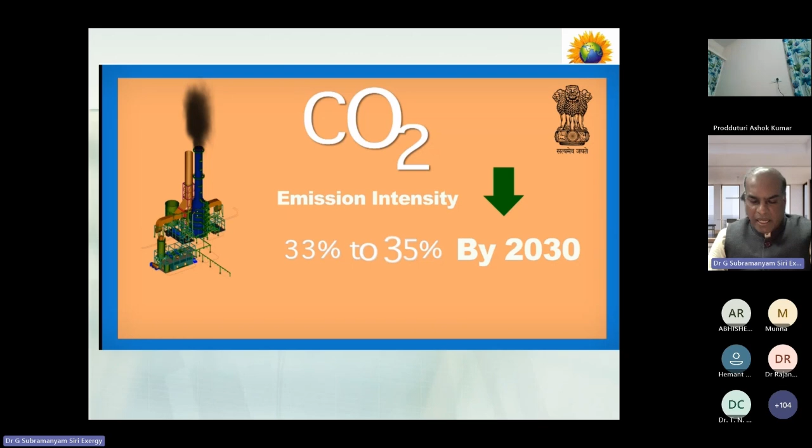Next, what is India's commitment? At COP26, our Prime Minister Narendra Modi agreed to make India net zero by 2070. If we look at this, I think it is achievable.

Earlier people said it was not possible, but the way things are going, different decarbonization activities are happening throughout the world, and we are achieving the targets we set. So 2070, though ambitious, is achievable.

Many companies in India, like Infosys and other IT companies, are already carbon neutral. From them we can learn many things about how to achieve carbon neutrality. Many activities are going on in each sector, whether industry, municipal, or agriculture, including demand side management for energy efficiency and decarbonization.

I can tell you about this, and give some case studies where we have done work and were able to achieve net zero.

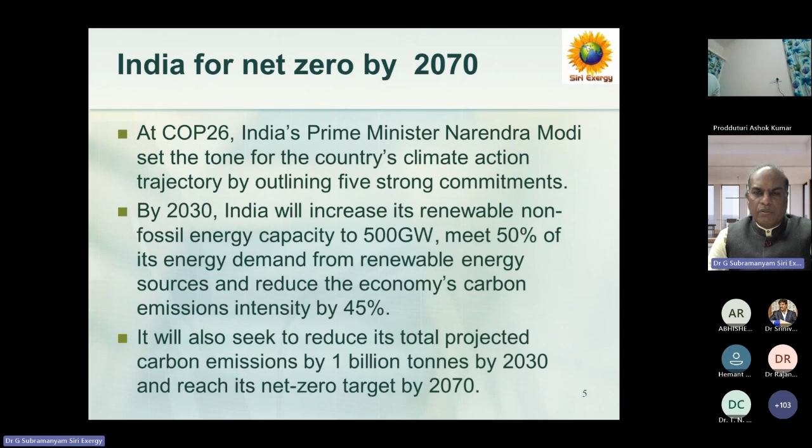So for that, first we should know what is the existing carbon footprint of any industry, or even your institute. Suppose you have Jalandhar NIT, there also we can quantify what is the carbon footprint. Once we know the carbon footprint, then we can devise an action plan for how to reduce and make it carbon neutral.

Depending on the funding available, or depending on the timeline. So anything is C plus O2 equals CO2. If you know the carbon content of any fuel, by burning it we can quantify how much CO2 is emitted. This is a simple equation: C is 12, O2 is 32.

12 plus 32 gives 44 kgs of CO2. By burning 12 kg of carbon, so that means per 1 kg of carbon, 44 by 12, that is 3.67 tons or kgs of CO2 is emitted. Based on that, we can find out how much CO2 is emitted by different burning of fuel. So do you have any idea?

Suppose every one of us is using power, because we are talking about this for 5 days, going to talk about different ways of utilizing power and multi-poly generation etc. So to generate 1 unit of power, suppose we are using a thermal power route. Thermal power, because almost 60 to 70% is still through the thermal route. So just I am giving a calculation.

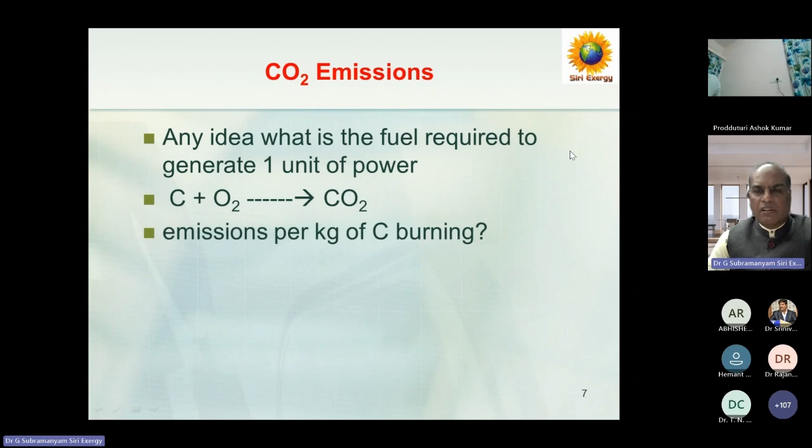So just I'm giving an example. So a simple example is, for anything we have to quantify the carbon footprint. Carbon footprint can be done for any industry or your organization, your own institute. So if you want to produce 1 unit of power, what is the carbon emission? It's just giving an example, because depending on the efficiency of the power plant, the supercritical plants have around 0.67 and efficiency goes to almost around 40.

But typical average comes to almost 1 kg of coal required to generate 1 unit of power, because now almost 60 to 70% of our power generation is through the coal, thermal route. So 1 megawatt requires 1 ton, 2 lakh megawatts of power out of around 4.3 lakh our installed capacity, and in that we take 50% average depending on the plant load factor.

So 2 lakh megawatt we are generating, that means we are consuming 2 lakh tons of coal. So that is, if you calculate what our emissions per annum are - since it's on an hourly basis, megawatt into hours of operation, 8760 hours. If you multiply, and also considering the carbon content in the coal, roughly 40%, it comes to 2.6 billion tons of CO2 we are emitting.

So where does all of it go?

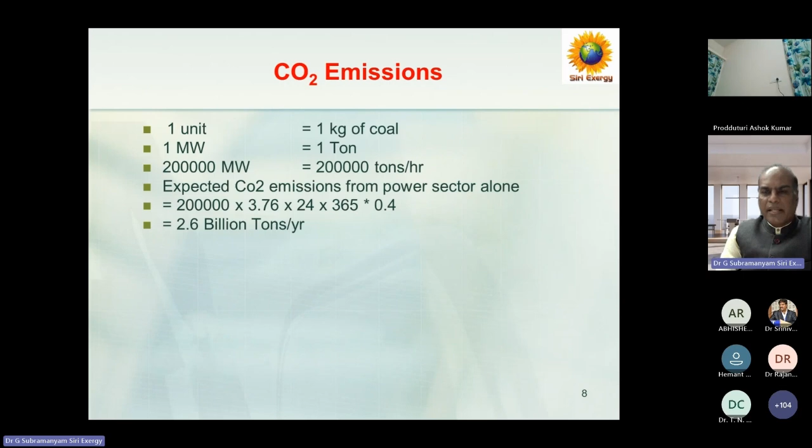So this CO2 is a culprit, and it is going to atmosphere and creating a global problem. That is global warming. So not only industries or power plants are emitting CO2, even you and I are also contributing to this CO2.

If you are using a 100 watt bulb, or nowadays even a 40 watt tube light, whatever, it is contributing. Even if you use it for 4 hours, we will be contributing almost 120 kg of CO2 per annum.

If you travel by car 300 kilometers, that contributes almost 66 kg. If you travel by train, that is 21 kg, because it has a large carrying capacity. Suppose you take a flight, Hyderabad to Mumbai or Mumbai to Delhi, a 1 hour flight contributes almost 164 kg of CO2.

Even if you watch TV for 6 hours per day, our contribution is 250 kg. A refrigerator working in the corner quietly contributes more per annum. If you add all this together, it contributes to almost 1.02, or roughly 1 ton of CO2 emissions per person per annum, that is per capita.

That means CO2 is not emitted only by industries. We are also contributing, either directly or indirectly, because all these emissions are contributed by us. So it is our responsibility to reduce these emissions wherever we are emitting. We have to identify ways and means of reducing CO2 emissions, and we have already taken a challenge for 2070. Now we are working on how to decarbonize, how to make it carbon neutral.

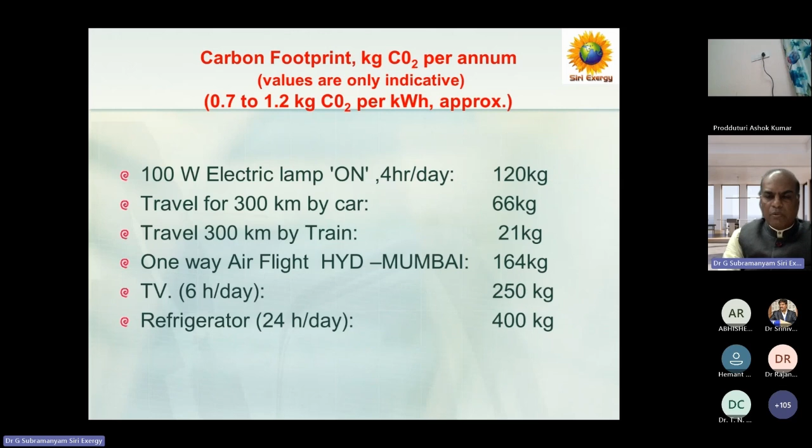Since many of you are learned people, professors in the teaching field, you know what the greenhouse gas effect is. Suppose we are traveling by flight, they announce you are traveling 30,000 feet above sea level, and the outside temperature is -40, yet you are maintaining a comfortable temperature inside the flight.

Why is this possible at that height? Because there is an atmosphere, and in that atmosphere there is CO2. CO2 is available, and in fact CO2 is a God given gift.

Sunlight takes almost 8 minutes to reach our mother earth, but the entire part is not absorbed, some part is reflected back. Whatever is reflected, the CO2 in the atmosphere brings it back to the earth, and by that we are able to maintain our temperature at 30 to 35 degrees centigrade, where we can live comfortably.

Whereas the same is not possible on other planets, because we know there are 9 other planets, but this is possible only on Earth. That's why people are able to survive on Earth, whereas on other planets we don't know if there is any life or not. So in fact CO2 is a useful gas, it is there in our atmosphere helping us maintain our temperature at 30-35 degrees centigrade.

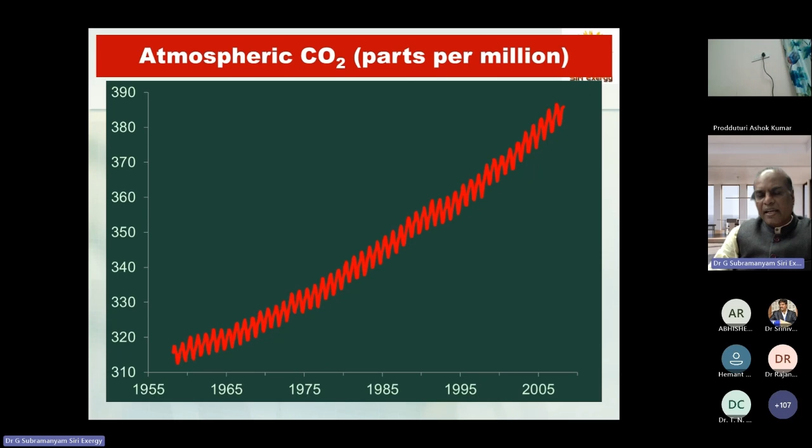It is the 10 warmest years, particularly now in 2025. You can see temperature is rising and also CO2 is rising. They are both directly proportional. This indicates there is a direct relationship, but we have data.

We have data since 1900. So it is not a single day or a single year, it is a long process. Over 100 years, our global temperature has gone up by only 1 degree. 1 degree is nothing, we can bear that, no problem.

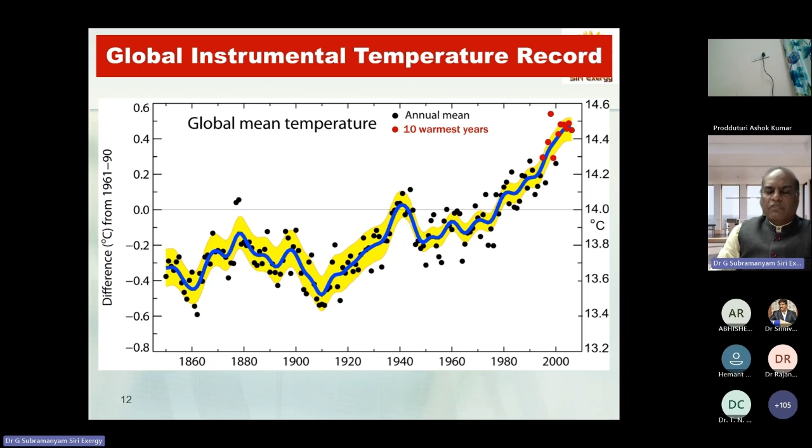But if the same trend continues, the expected rise in temperature is 4 to 5 degrees in this 21st century. Imagine 4 to 5 degrees increase, what is going to happen?

What will happen? This is happening every second, every minute, every hour. If you see the ice melting and ice falling, it looks very beautiful, but the problem is this is happening. We should be able to control it, we should be able to curtail it. Otherwise our sea levels are rising.

As I said, over 100 years our sea levels have risen by only 1 meter, with 1 degree rise. Imagine now if the temperature globally increases 4 to 5 degrees, there is an expected rise in water level. Most of the low-lying areas may submerge, particularly some areas like Andaman, Nicobar, or some other regions, they may submerge in the water.

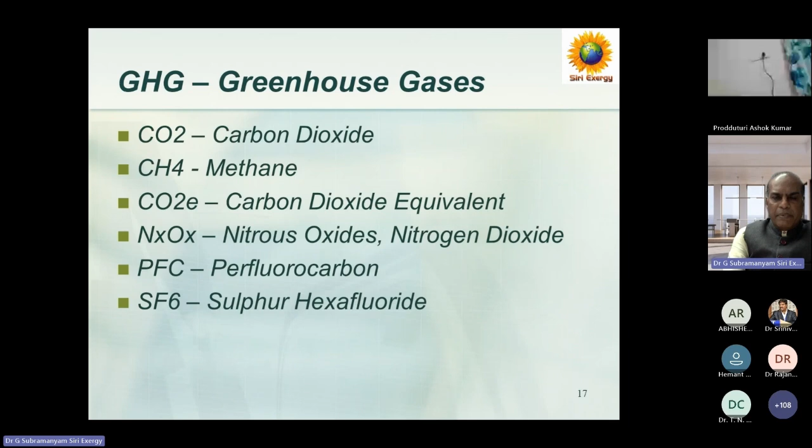So like that there is a global warming potential for each gas. Once you know, suppose CFC has almost 4,500 global warming potential. If 1 ton is released to the atmosphere, by multiplying by 4,500 you can know the carbon credits or carbon emissions. Whereas for methane you multiply by 27, and for nitrous oxide you multiply by 270. This is how we can quantify greenhouse gas production, in case we want to convert it into carbon credits.

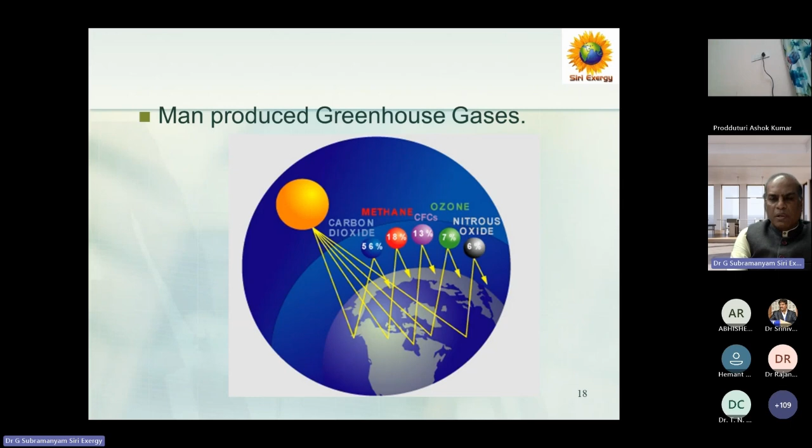So now we want to make a carbon footprint of your campus. So what are they already divided as per the protocol? As per the protocol there is scope 1, scope 2, and scope 3.

Scope 1 is mainly direct emissions. In case in your campus you are running a DG set, or you are using LPG in your campus, it is a direct emission. For direct emission we can quantify how much diesel is burned, then there is a conversion factor, based on that we can quantify how much CO2 is emitted in direct emissions.

Then scope 2 is indirect emissions. Indirect emissions in the sense, suppose you are using electricity, say in Punjab or Jalandhar, wherever, you are using Punjab Electricity Board. So from there, nearby power plants are there, number of power plants are there. But it is an indirect emission - you are using electricity, whereas the emissions are at the powerhouse. So that is called indirect emissions.

So next is scope 3. Scope 3 is related to travel, business travel. Suppose you are going for your official purpose, to say Delhi or wherever, either by flight or train or by bus. So that has to be accounted.

Suppose in the industry there is a transport system - transport of raw material coming in, and the final product going out. So for both of these you are using some vehicles. There are some of your own vehicles, and also some outer vehicles, maybe belonging to Ola or cabs, or for transport from a contractor - contractor vehicles keep going. So these are quantified under scope 3.

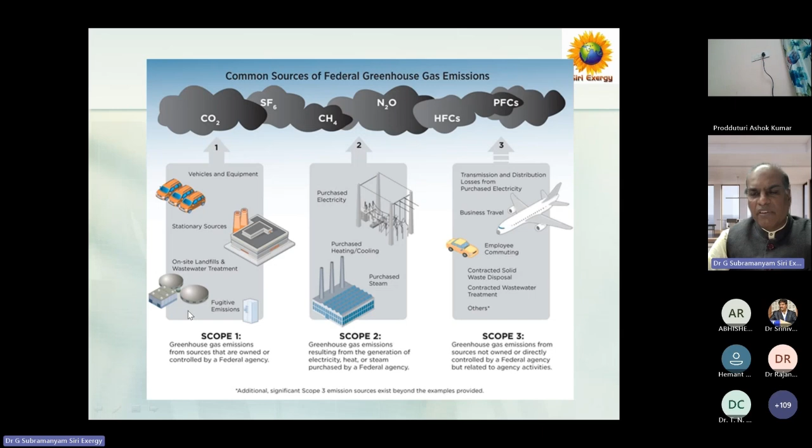This is why I would talk about travel. Suppose you have a college bus or university bus - that has to be accounted in scope 1, because you know how many trips it makes, how many days it travels, so you know the quantity of diesel or petrol used. Whereas individually you using your own car is optional, whether you want to quantify it or not. But if it is a company or university-owned vehicle, that can be quantified under scope 1.

Next is what are the main contributors. As I said, suppose you have a boiler in your campus - it may be there only for research purposes, whereas in many industries a boiler is a must and operates 24 hours. Whereas a DG set will run only during emergency, whenever there is a power cut. And again, a gas turbine - if it is a gas-based power plant, the gas turbine also runs depending on gas availability.

Transport is a major contributor, because every chimney of a two-wheeler or four-wheeler is a potential emitter. Then AC, as already said, chlorofluorocarbons we are using in ACs. Then some processes also emit CO2. Then fire extinguishers use some amount of chemicals. Then food preparation, that is canteen.

So you have your own canteen or maybe a caterer. The caterer will bring food inside, or wherever you are using it inside campus, you are using some LPG. So the amount of cylinders you use, how many cases of LPG is burned inside, those have to be counted.

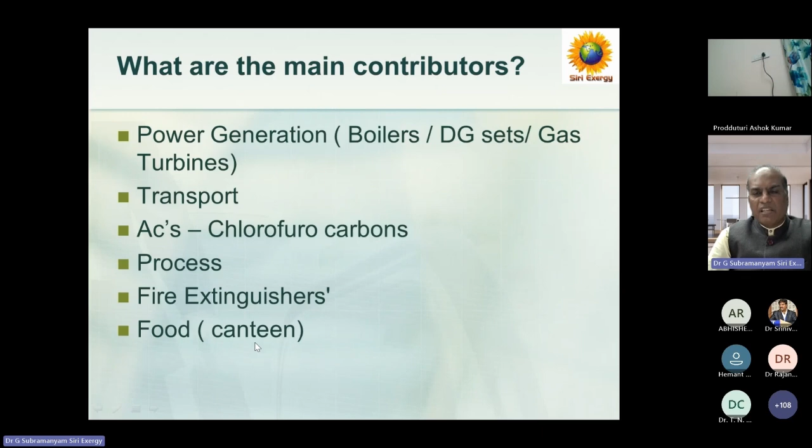Those figures have to be taken from your HRD department or finance department. These things have to be quantified, and there is a conversion factor. By applying conversion factors, everything will be converted to equivalent CO2.

Then, what are the possible areas for carbon footprint reduction? Once you identify the source, you have to find out how you are able to reduce it. So one is energy conservation, energy efficiency.

By increasing efficiency, suppose you had earlier a boiler efficiency of say 80%, you can go for 85-88%. Suppose you were using a gas fired boiler, you can go up close to 90% also. So energy conservation, energy efficiency, that is a major area.

Suppose your equipment is very old, so efficiency has gone down, there is a lot of variation from the design and the actual. So we have to find out what is the deviation. Then we can think of going for energy efficient equipment replacement.

I am giving just one example of AC. So it's a window AC. Earlier there was 2-star, 3-star, 5-star. Nowadays there is an inverter AC, which gives almost a 40 to 50% efficiency improvement. So like that we can able to improve the efficiency of the system.

Even we can have some energy efficiency gadgets available, those can be attached. Maybe we can go for some variable speed drive, and the inverter AC is nothing but a variable speed drive. So by efficiency improvement, by adding those retrofits, we can able to reduce energy consumption and increase efficiency.

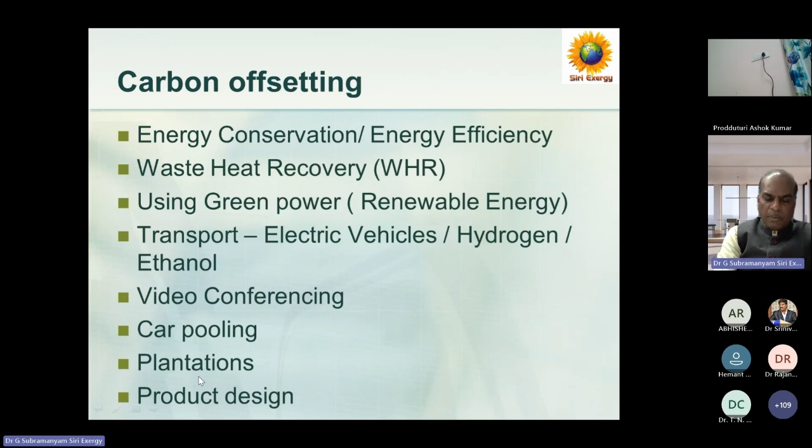Another simple example: lighting. Everybody wants light. Earlier we used incandescent lamps - suppose 100 watts used for 1 hour contributes 110 grams of CO2.

The same LED lamp gives equivalent or even better light. Comparing lux, an LED lamp can give more than 120 lumens per watt, or nowadays even up to 200 lumens per watt. So a 9 watt LED gives equivalent light to 100 watts.

That means we are directly reducing about 90%, almost 91% of energy, and also 91% of emissions we can reduce. So this is the simplest example of how energy efficiency can reduce our carbon emissions.

And also the investments - if we calculate, an ordinary bulb may cost 10 rupees, but an LED lamp may cost 100 rupees. Though it's 10 times the cost, if you look at the life, an ordinary bulb may last only 500 hours, whereas the LED lasts 50,000 hours, as per the standard, and we can calculate the cost accordingly.

Suppose you replace one bulb, we can save roughly 90 watts. If you use it for 5 hours, that's 90 into 5, meaning 450 watts saved per day. Divided by 1000, that's 0.45 kilowatt-hours per day you can save.

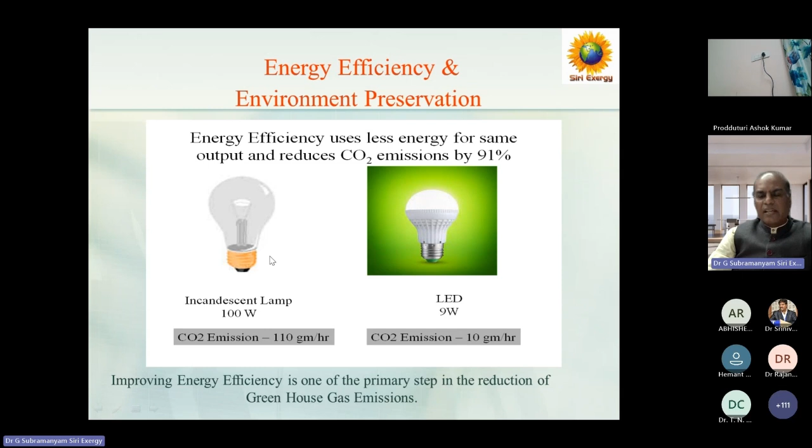Srinivas Garu has already explained that we are an accredited energy auditor. We have received best energy auditor of the year award more than 10 times since 2008, and we carry out audits every year, as it is now mandatory. We are also implementing ISO 50001 near you, in Chandigarh. Recently we carried out an energy management system implementation at Nabha Power, which has a supercritical power plant. There we implemented ISO 50001, and we are also doing net zero building audits.

So we have done already 2-3 audits for NTPC, admin building, there is a service building, and carbon footprint studies. So we have done for HPCL, Midhani, BDL, Bharat Dynamics Limited, one is a pharma company, in coal fields, Jindal Stainless Steel. So these are the audits we are doing for net zero buildings, and also for the carbon footprint studies, so that we can able to make them net zero in future.

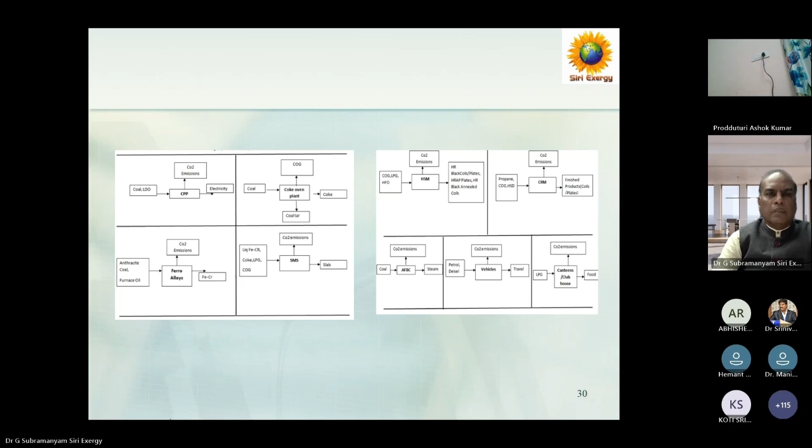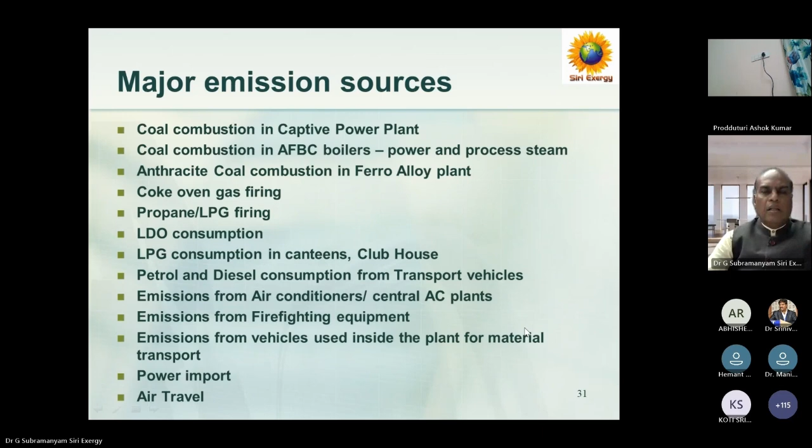So this is quantified, you can see scope 1, scope 2, scope 3. Of course, we have done this some 4-5 years back. See what is the total emissions, GHG emissions? Here it is almost 24, almost 25 lakh. So 25 lakh tons of CO2 is being emitted every year, and under this the scope 1 is major.

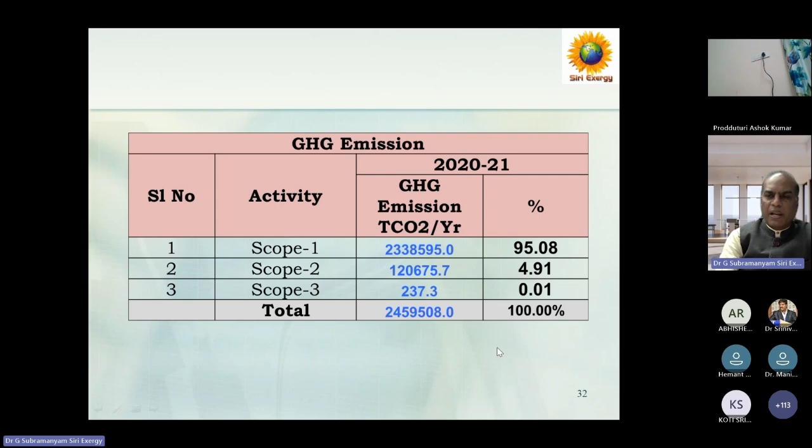95% is scope 1. Scope 2, because their power, they are getting from outside, that is imported power. Though they are generating power, for that coal is used, so that means that coal is burning inside, so it comes under scope 1. Whereas scope 3 is nominal, whatever scope 3 travel, it is nominal, 0.01% that can be neglected. So by this we can able to know which is the contributor, scope 1. So for scope 1 we have devised, we have told them what are the action plans we have given. So this is the total carbon footprint of this company, around 25 lakhs. Then SMS production, because you have to quantify in terms of per ton of production, so per ton of production, total employees are, you can able to quantify.

Suppose in case of your campus, we can quantify in terms of number of people staying, either faculty or students. Whereas here you can quantify per ton of production. So per ton of production is coming to 2.8 tons of CO2 per metric ton of production. And specific emission per person is coming to almost 300 tons per person.

So whereas there is a steel, international steel norm. What is the international norm? International norm is 1.85. So there is a mark, whereas these people are at 2.8, whereas international norm is 1.8. That means there is a scope for improvement. So by this, we can able to see what is the margin.

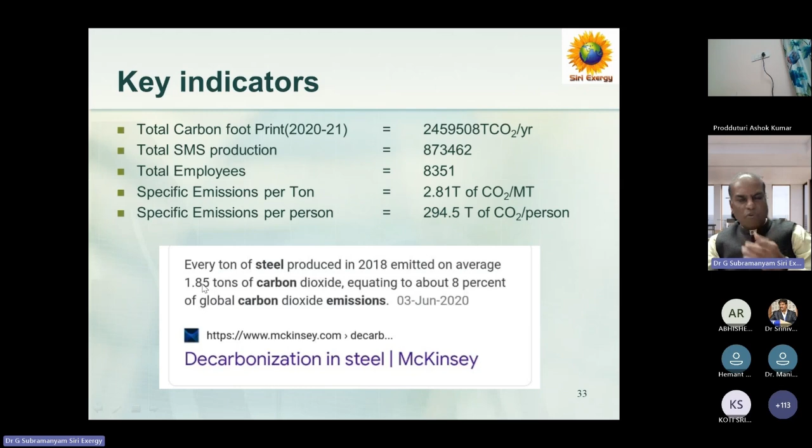In our case, we have given some, because I cannot reduce total. So what are the possibilities based on our audit, we have given equivalent, because we have done it through energy efficiency. Energy efficiency, we have given an action plan to reduce almost 50,000, in terms of MTOE, that is metric tons oil equivalent. Even this has been signed by those people. As energy auditor, I have signed. As the energy manager, their energy manager signed. So based on that 50,000 equivalent, we can able to say reduce in a 1 year period.

And there is an equivalent we can able to convert. Roughly 1 ton of oil equivalent to 3 tons of CO2. So you can simply multiply by this. That means almost 49 to 1.48.

Then through plantations, we have quantified how many plantations have been done. However, what is the growth every year? Based on growth, we have quantified how much carbon sink is being created. So total 1,51,000. That means what is the percentage reduction? 7.36.

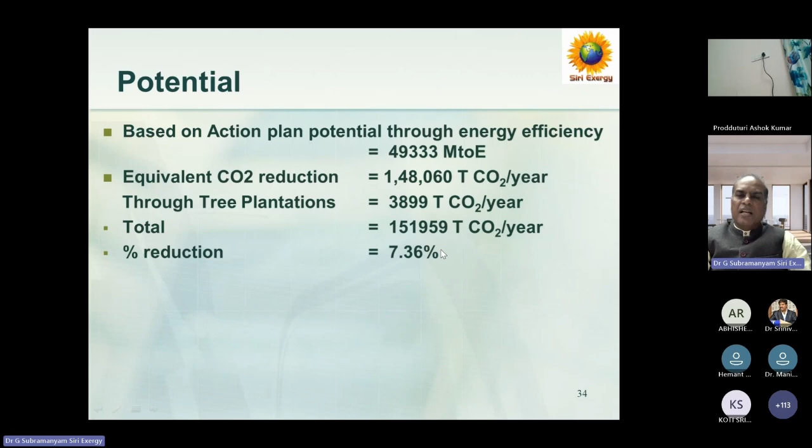So what we can able to, because this is possible in the steel industry or cement industry, where you can't give carbon neutral. That means totally they cannot do it. They have to go for, maybe they have to buy green power, then can able to make it carbon neutral. On their own, they cannot able to make it, because nobody can produce steel without carbon, without power generation etc. So this is a possibility, 7 to 10% is possible. This is already being implemented, and able to achieve sometimes very close to this.

I'm giving another example, green building. One I talked about mines, second is the steel industry, next is the building. This building again is applicable to you also, your campus also possible, because depending on your square feet, what is the area of your campus. So what units consumed per day - one of the buildings consumes, roughly per day it is almost 1500 units.

1500 units per day consumption. And also number of days working, 300 days, number of holidays, working on holidays - what is the load, the non-working days consumption we have taken, suppose in your case Saturday, Sunday. In annual consumption we have quantified and converted, because every year CEA, Central Electricity Authority, publishes the CO2 emissions, because not only coal - we have nuclear, solar, wind.

Nowadays biomass is very nominal. So those things, because it's a mix, energy mix. Based on that, we can quantify what is the emission factor. This emission factor was 0.82 earlier. Now this has come down to almost 0.73, because efficiency is improving - we are adding more and more solar to our grid. That's why emission factor is coming down every year. Earlier it was 0.82, now it is only 0.75 or 0.76.

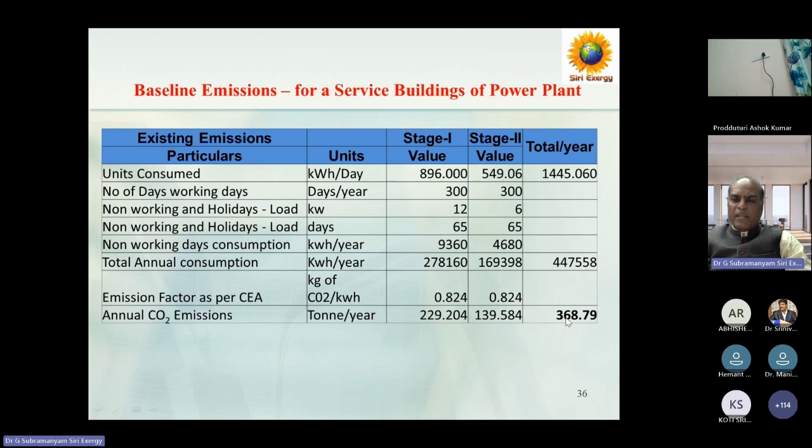So annual emissions we have quantified only 368 tons, but 368 tons is very nominal for a building - they have a small service building. So we identified we can go for internally putting some solar, and we try to reduce by energy efficiency, whatever ACs are there, whatever lighting is there. Through that we have given an action plan, to make it net zero.

So we have given - use energy efficient fans. Nowadays in the market there are BLDC fans. By that, how much can it reduce? Energy saver for split AC, energy saver for solar - by solar we can able to reduce. Replacement of old ACs, cost economic usage, suppose for conferences etc.

We can go for a skylight. By putting a skylight, we can reduce power consumption during daytime, so whatever daytime you are working, you can put a skylight. Then delamping of corridors, wherever lux levels are high, we can reduce this by stage 1, stage 2. So total put together, we have given an expected CO2 emission reduction close to that, meaning they can make it net zero just by implementing some of these options.

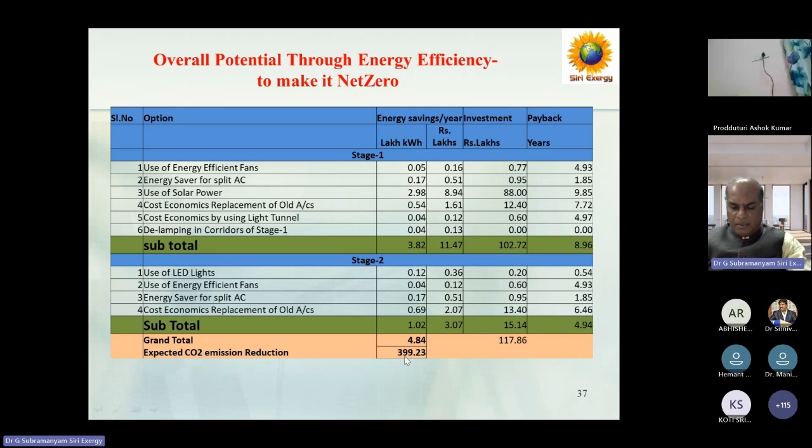So now, any doubts so far? So that we can give another study recently we have done for one of the pharma companies, some pharma companies, under decarbonization.

Government of India, through the Bureau of Energy Efficiency, recently brought out, because earlier we were doing PAT, that is Perform, Achieve and Trade, converting into carbon, equivalent metric ton of oil equivalent. Based on that, one oil equivalent equals one energy saving certificate. Now in future, we are all going for a carbon credit trading scheme. So whatever carbon credit, earlier it was for the international market.

Whereas this carbon credit, the PAT scheme, Perform Achieve and Trade scheme, was only applicable for India. So the Bureau of Energy is converting to CCTS, and the framework has been created. Shortly they are going to announce the targets, because already under CCTS the baseline audits are over for a number of sectors, and they are going to give a target. Once the targets are given, they will be given a time frame, maybe 3 to 4 years, within which they should be able to reduce, otherwise they have to pay penalty. So the penalty is going to be huge.

Nowadays, for 1 metric ton of oil equivalent, the cost government has fixed is 18,402. That is the maximum price, and this again depends on market trading, so depending on the market it will keep fluctuating. There are more sellers nowadays than buyers, so it has reduced to a low now. But the minimum cost is 1,000 rupees for 1 metric ton of oil equivalent, and that 1 metric ton equals about 3 carbon credits. So this scheme is going to come shortly.

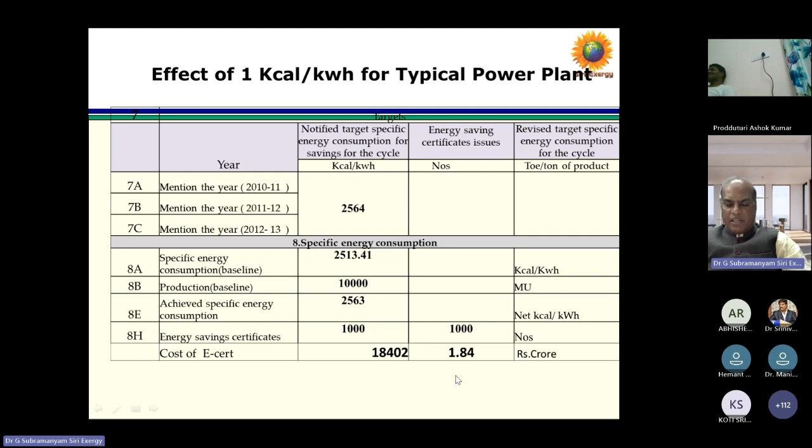I'm giving another example. Suppose in a cement plant, also same. So they convert kilocalories per, not kWh, this is per ton of cement production. What is the metric ton of oil equivalent? That is equivalent to 699 kilocalories. 699 kilocalories of energy is required to produce 1 ton of cement.

Suppose if you are able to reduce it from 699 to 698, that means, this company having a production of almost 41 lakhs of cement they are producing. And this is all actual figures, I am not theoretical. This is all based on the Gazette of India, and their actuals I have calculated.

So if they can reduce by just 1 kilocalorie, they can get an energy saving certificate of 410, and at 18,402 they can get a benefit of 75 lakhs as an incentive. So this is an incentive, in case they don't reduce, there is a penalty also. So hefty penalty is also there.

So PAT says you can use it both as a reduction tool and also as a tool for imposing penalty. If they don't, a penalty will be referred, and it is given as non-conformity, which they have to submit or buy from the market. Suppose there is a shortage, instead of positive there is negative, so many of the 410 energy saving certificates they have to buy from the exchange.

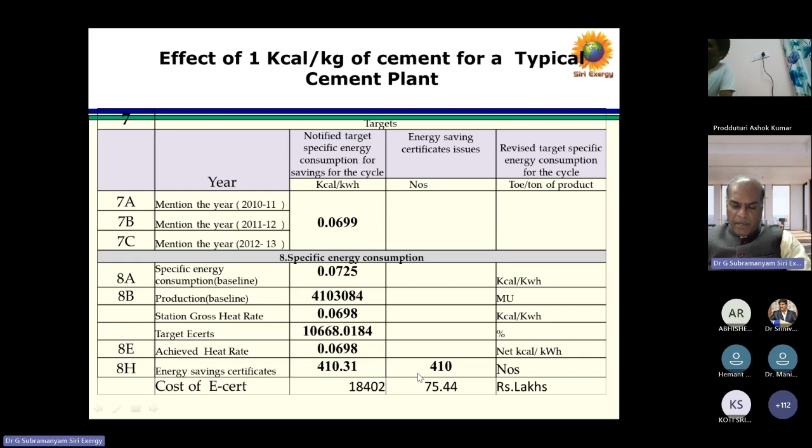Suppose some instrument is there and calibration is not done, so you can get it calibrated and close that non-conformity. All this can be done by spending a small amount. Whereas here, there is no other method to close non-conformity, you pay penalty. So whatever you are showing here as penalty, it comes to huge lakhs and crores. That amount has to be paid, that is closing the non-conformity.

So I am giving another example. Suppose a distribution company, Punjab State Electricity Distribution Company is there. So they also have targets, they are typical. So 14.44 is the T&D loss, that is transmission distribution loss. This can again be checked from the Gazette. So this is 14.44.

10,224, so 10,224 is their baseline, this is the target. If they are able to go below the target, they can get 10,224 energy saving certificates, or in terms of rupees, 18.81 crore benefit they can achieve at the higher rate. But the minimum rate is 1,000 rupees. Even at 1,000 rupees, if you calculate, they can get almost 1 crore. So 1 crore easily can get a typical DISCOM. Maybe Punjab may be divided into north and south, typical DISCOMs.

Sir, please unmute, sir. Please unmute. I don't know. Now, thanks.

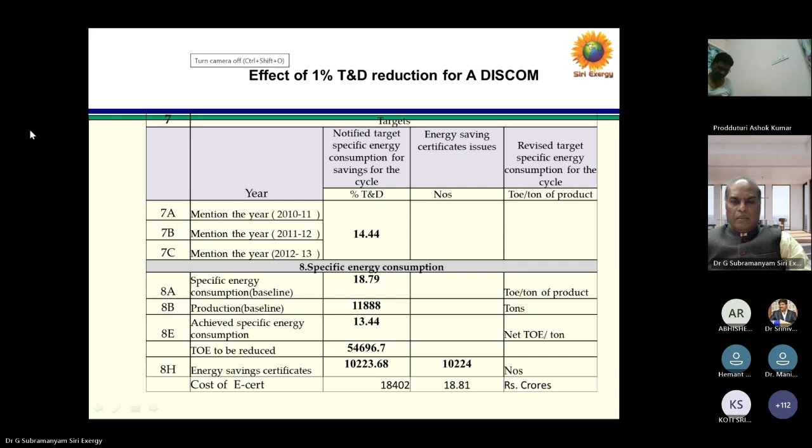So I'm just giving this because that's what I told you. We have another - how much time? So still another half an hour is there. So I'm giving half an hour.

This recently we have done, because everything we are converting into carbon. Whatever energy savings, everything we are converting into carbon and showing what decarbonization is taking place. So this we have implemented.

Can I go ahead? Yes sir, you can proceed. This is a pharma cluster in Vizag, that is very close to Visakhapatnam in Andhra Pradesh. We have implemented in 5 of the pharma companies under this, again sponsored by Bureau of Energy Efficiency and also AP State Energy Conservation Mission.

Recently we have done the post implementation workshop, dissemination workshop, and we have given our baseline, how much actually we were able to save. Because one is doing energy audit only on paper - we will be able to show you can save 20%, 30%, but actually is it really possible or not. So we have done the dissemination workshop recently and see what is happening.

So this is a typical chemical plant - these are pharma companies. So for pharma companies, we have quantified their KWH power consumption etc. Suppose this is a typical company, per month they are consuming almost 4.5 lakhs. So in your case also, your campus may be consuming more than 2 to 3 lakhs per annum, per month. So that can be equivalent to almost, maybe minimum 10 lakhs power consumption may be there.

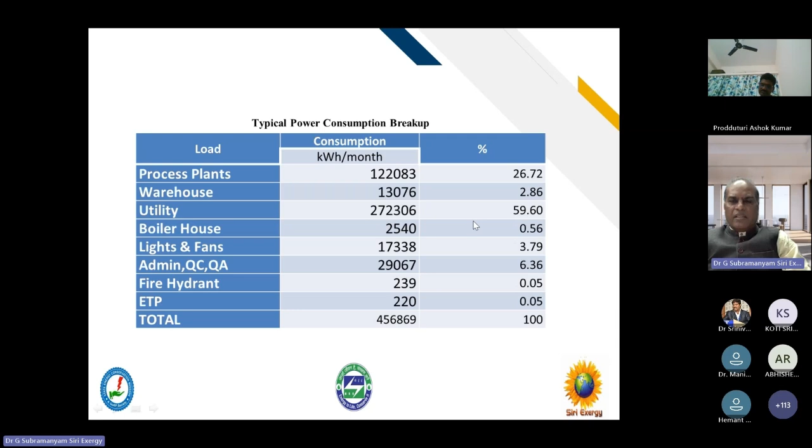Next, again we quantified in terms of carbon emissions. So carbon emissions is coming - what is electricity, diesel, coal - these are major fuel sources. That converted into GHG emissions - it is coming, based on entire energy consumption bills, we quantified it in terms of rupees.

The total bill comes to 1252 crores in that area, that is almost 90 units. So these 90 units are converted, and it is contributing almost 14 lakh 60,000 tons of CO2 being emitted by only one cluster.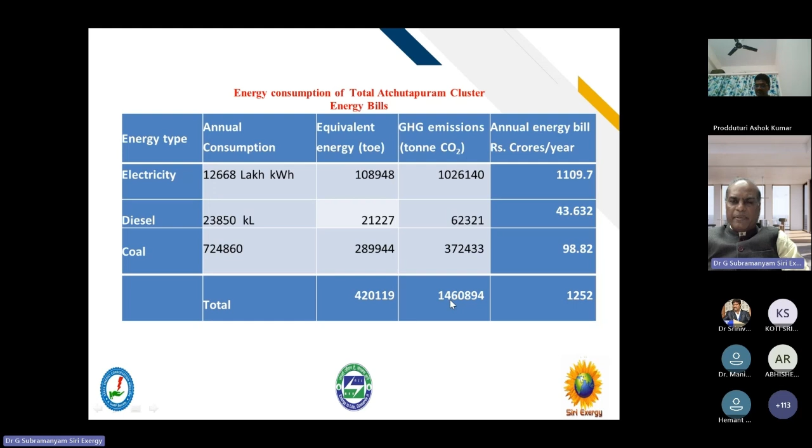And to reduce those emissions, we identified some technologies which can be done so that we can showcase, we can able to reduce. One is variable speed drives for chillers, because pharma companies use chilling at either -10, -20, or +5 degrees etc. - they use different applications. And for the chiller, again there is a compressor - a refrigerant compressor - that is a major contributor.

So in addition to the chiller, there are pumps - primary pumps, secondary pumps. Then there is a cooling tower. So these are associated equipment.

Then another equipment we identified is the FRP blades for cooling towers. There we identified another - air compressors. Air compressors, again, is a major utility in any company. Even if you go to your campus, there will be an air compressor in your STP or ETP, or even in a hospital - there is an air compressor for the ventilation.

In place of PRDS (pressure reducing and desuperheating stations), micro turbines are one option we identified, along with VFD for ID fans, energy saver for AC plant, and solar rooftop. These were identified, but based on available funding, since we have limited funding, we implemented only select ones. As per our scope of work, we were able to showcase 3 technologies and show savings.

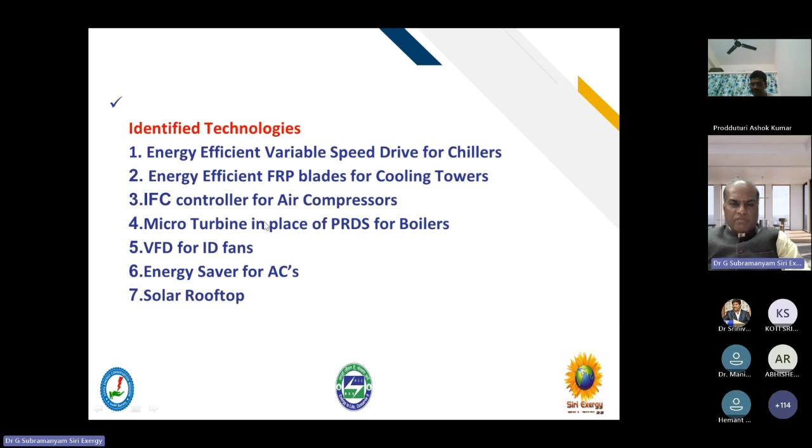The first one we chose was chiller as one of the options, and we implemented it. This is a Voltas chiller. Earlier there was a star-delta starter, which we replaced with this VFD.

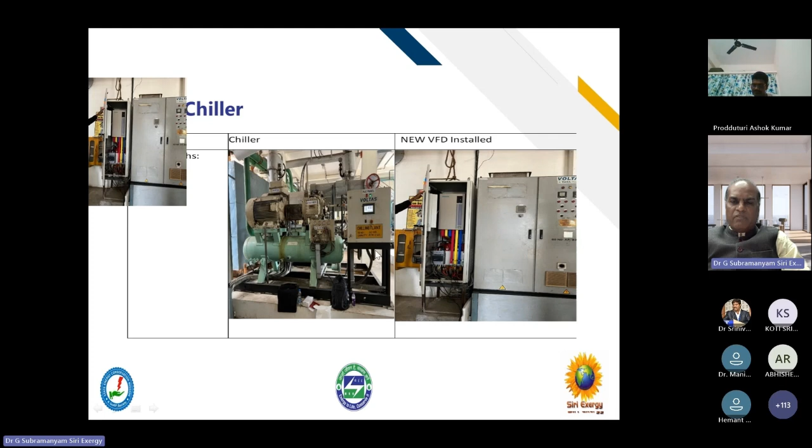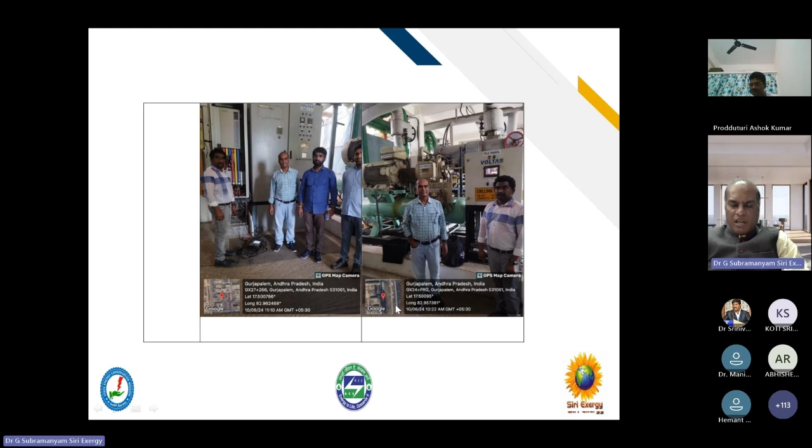I'm standing here myself at the site where we recently implemented this. You can see the geotagging, because this is a government-sponsored project. They asked us to show where we implemented it, so we gave geotagging with latitude and longitude, so they can pinpoint exactly where we implemented it, and anytime they can go there to see whether savings were really achieved. We implemented this, quantified the savings, and got people to sign off.

By just implementing VFD, there is an energy saving of 18.34%, based on actual KW basis, KWH basis. Additionally, we showed savings in terms of TR (ton of refrigeration). Earlier, at -5 degrees operating condition, under the same conditions, we got the same KW but 15% better TR.

All of us signed off on this - the supplier, Siri Exergy, and also the user, Innovator Labs - showing how much saving was really achieved. We also showed the payback period. We invested around 5 lakh rupees for that VFD, and the payback period is less than 1 year, which means the rate of return is more than 100%.

This VFD was for a 180 kW motor, which we replaced, and the actual saving is almost 18%. The power tariff, cost of energy, is 9 rupees per unit. Based on that, we quantified and showed these savings.

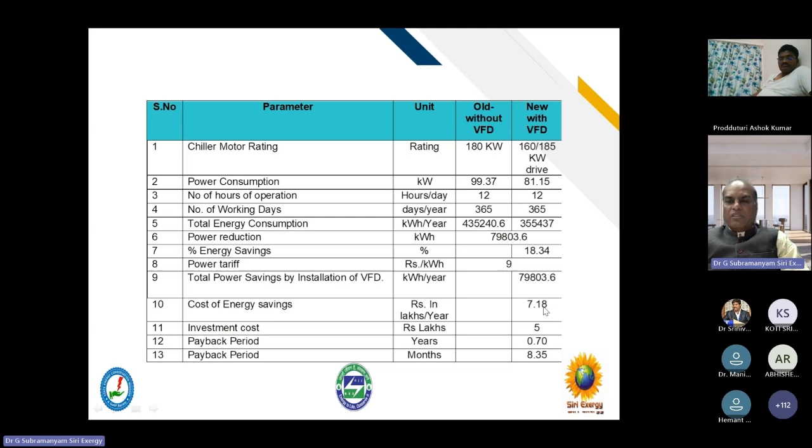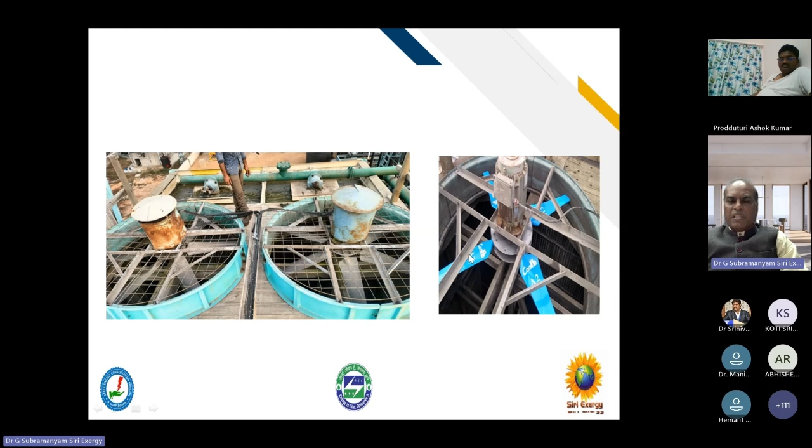Another major utility is the cooling tower. Most campuses have cooling towers for centralized AC. Earlier they had aluminum blades, which we replaced with FRP blades. You can see these are the blades.

I climbed up myself again, and here's the geotagging with latitude and longitude showing where we implemented it in another unit, taken with a GPS map camera. Can you guess what savings we got just by replacing the fan blades? We didn't replace any motor - same motor as before, only the fans were replaced.

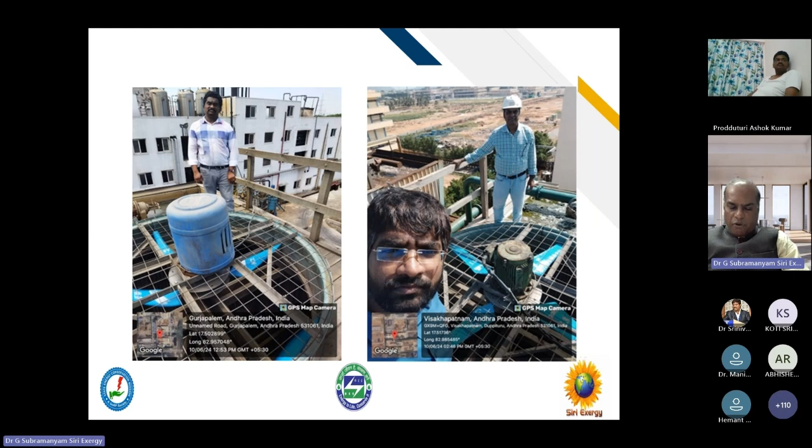We got an energy saving of 23%. Additionally, by replacing this fan, there was an increase in airflow of 17.54% - an additional benefit. There may be further savings benefit in the chiller due to increased airflow, but we could not quantify that actual benefit.

This other company is SSV Pharma. Earlier we implemented this in Innovator. This is another technology available in the market, even on Amazon - you can buy it there too.

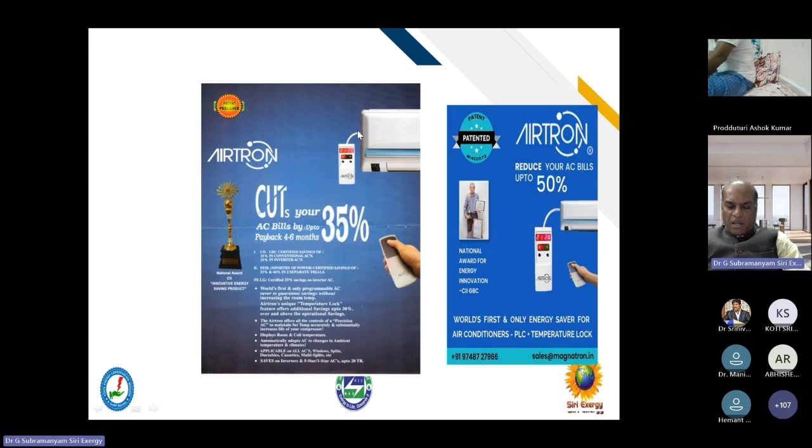So they are claiming 35%, even up to 50% saving from your split AC. So split AC, this is again, we bought a few pieces from the market and we have installed. This is a 1.5 ton AC we have implemented.

So my point is, we are using the energy meter, we are connected to energy meter also. For individual units, we bought an energy meter even to connect to one fridge, because otherwise it's very difficult to know the savings, since sometimes it is in watts only, and no regular energy meter will measure watts. So we bought one energy meter separately and installed it, so that we can show running the AC with and without the energy saver. This is the energy saver, it is connected, it looks like a small stabilizer with a display, and we implemented and showed the savings.

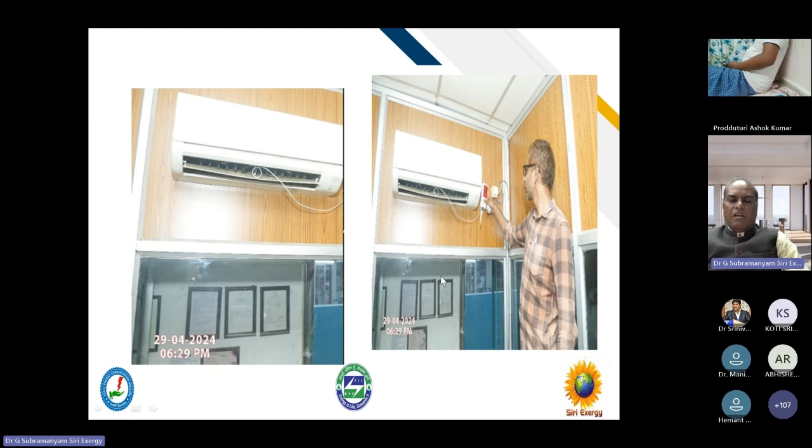So by this we got, almost in peak summer, here you can see the day and time, we have peak summer implemented, here also we got almost 16 to 17% saving. So 16 to 17%, this can be done even for your house also.

In our house, whenever any area, in fact we have demonstrated and got it signed off. So like this, we have implemented in some of the FRP blades, and also VFDs, and also the energy saver, and you can see the actual savings, and what is the investment made, and overall the saving, this payback period is less than 1 year.

So 1 year means you can say 1 by 1. If it is 2 years, that means 1 by 2, which is 50%. So you can see 0.7 means your rate of return is 1 by 0.7. So this is 1 divided by 0.7, almost 142%. So 142% is a very good investment.

Even if you put it in a bank, nowadays banks are giving hardly 6 to 7%. Even if you are a senior citizen, they give another 0.5%, so not more than 8% you are getting. Whereas by investing in energy efficiency, you can get returns of more than 100%.

So this is practically shown, and we have quantified it. Suppose the entire cluster, because I showed what the entire cluster is, how much they are able to save, if we invest only a few lakhs, with 4-5 units implemented, the actual savings we have shown.

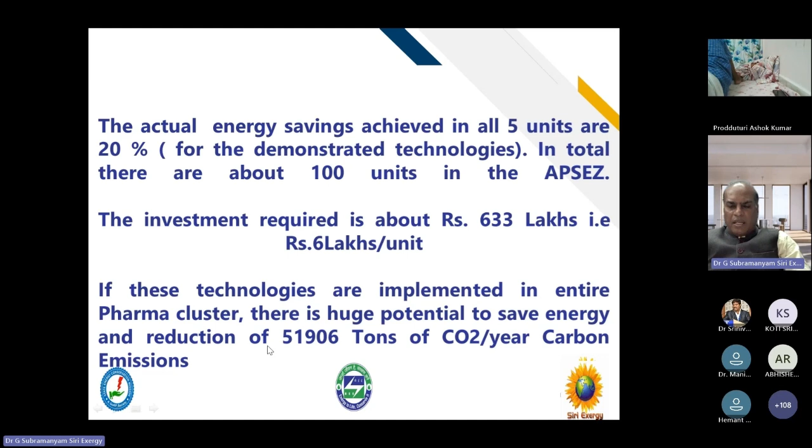It can be replicated. In fact, we have done a similar study in Jalandhar, in one of the engineering industries, particularly the forging industry. Earlier we have done some studies in Jalandhar itself, and Patiala, those areas we have done earlier.

So what I'm going to do is, whatever I shown, we are actually practically showing them, implementing and showing it. In fact, afterwards, we did one of the cold storage projects. So cold storage also we have recently implemented and showed savings by replacing the cold storage.

Again, there is a major contributor, the chiller, that is, they use an ammonia chiller. We have, in fact, one company even replaced it. So a chiller was running based on the gasifier, because in some areas rice husk was available.

So rice was converted to gasifier, and the gasifier producer gas was given to the gasifier, and through the gasifier that gas was given to the DG set converter. But after some time they found a lot of problems with the tar, so they replaced it again.

What I am going to tell you is there is always scope for improvement, and where there are targets, the government is strictly implementing policies, and we have to make it net zero by 2070. Otherwise there are huge penalties, and also incentives. So we can save energy, save our planet, save today, survive tomorrow, and also get additional revenue, because not only by spending, I can also get an energy saving certificate either through ESCerts or carbon credits.